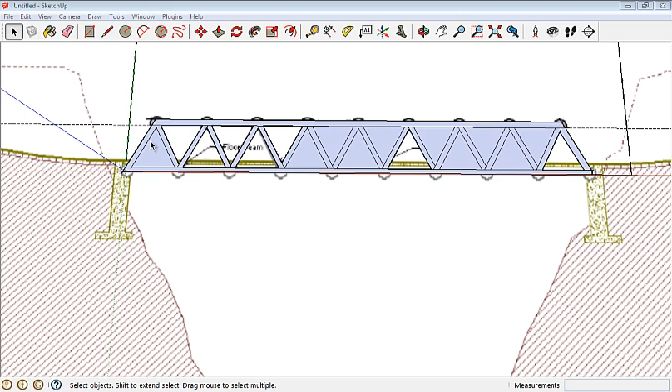Now that I've got a rough sketch of my bridge in SketchUp, I'm going to clean it up a little bit, starting with deleting these extra pieces of the triangles. Just clicking the delete button on your keyboard can delete those a little bit faster.

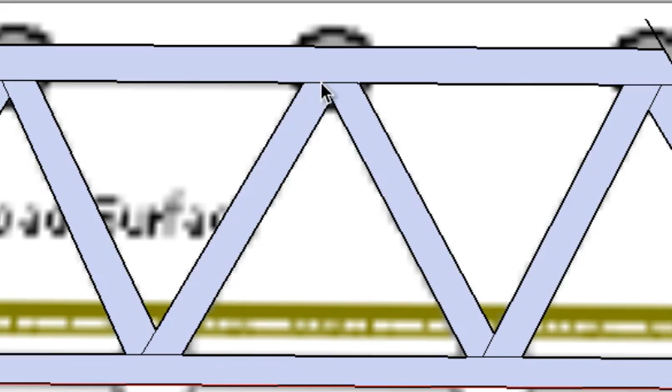There's quite a bit of other cleanup I still need to do, starting with any little lines sticking out the edges, and all these little lines connecting the pieces. To see that all a little bit better, I'm going to hide my screenshot. You can do that by right-clicking on it and going to hide. Then you can see I've got even a couple other lines up here that I need to erase from my starting rectangle.

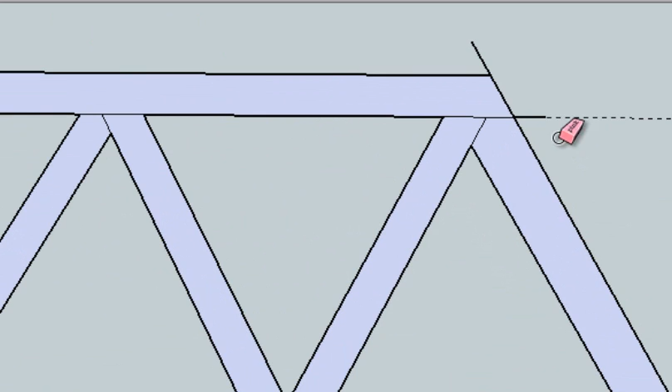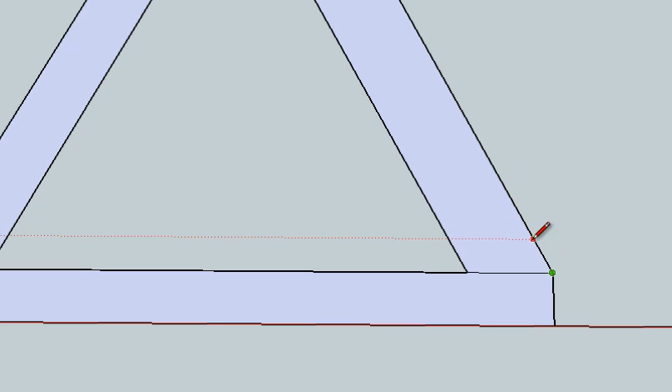Any lines that are sticking out need to be erased. Any lines that are connecting pieces together on the inside should be erased, so that we have one continuous surface. This corner I'm even going to clean up a little bit by extending this line parallel to that one all the way down. Now I can erase that, and that, and that. I'll just kind of move across my bridge, checking it closely for any of these lines that we're going to erase.

Alright, so you can see now I've cleaned up my bridge file. I've erased any extra lines that were sticking out or any of the extra lines in all the joints. Unfortunately, it's not a perfect replica - this V is a little bit taller than some of these other ones, but it's at least a close model to what I was working with in West Point Bridge Design.

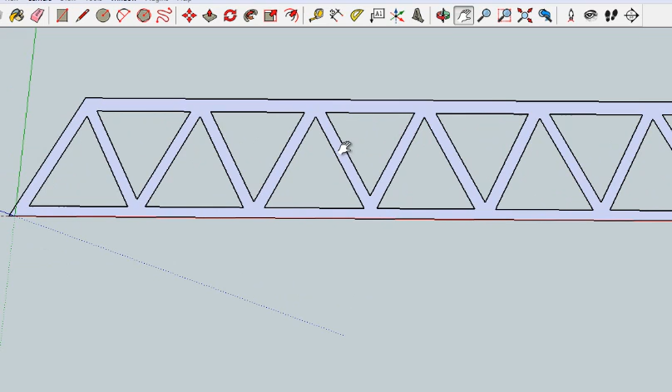You could definitely be a little bit more accurate by using measurements, maybe get a rough design and then specify the length of each one, designing it a little bit cleaner. But for a first practice bridge, this will definitely work.

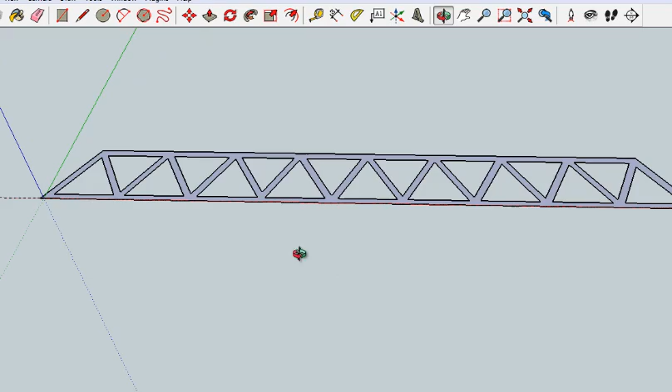Once you've got your model completely cleaned up of any stray lines, we can very quickly extend it vertically with a push-pull tool. The event description says we want the bridge to be around 1 inch wide - that's going to help it be a little bit more stable as we are testing it. So it should be between 1 and 2 inches, meaning at least 25.4 millimeters or anything up to 50.8 millimeters.

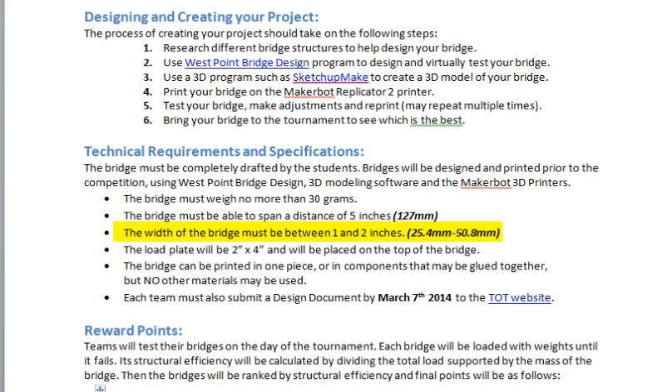As I am pushing this up with the push-pull tool, I want to watch the dimension box down here, the measurement box, to make sure I'm at least 25.4 and not more than 50. So this would be 25.4, and I kind of like that. Maybe I'll do a little bit more just to be a little bit extra.

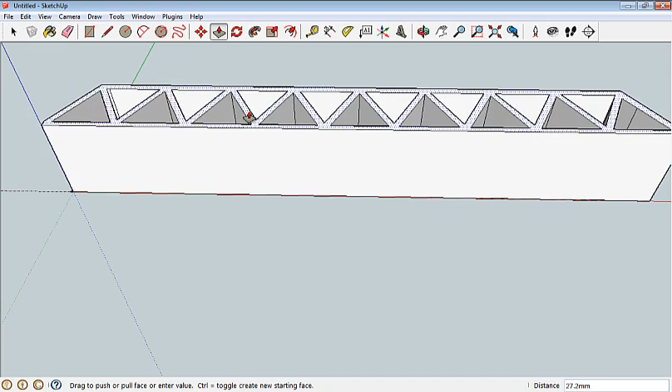Now I've got a very rough model of a 3D bridge that we would be able to print and test. Now you're actually looking at your bridge on its side. I'm going to recommend to print it vertically.

It's actually going to print a lot better vertically. The printer needs material underneath it to print well, so by printing vertically there will always be plastic underneath each one of these sections as it builds your bridge model.

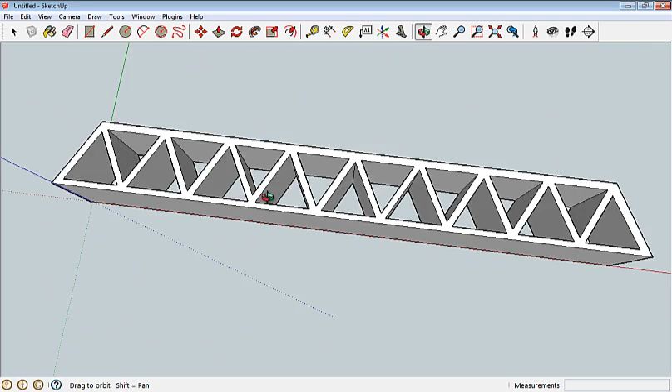If you were to print it sideways like this, you'd have a lot of places underneath these V's. As the printer begins building the bridge and adding plastic, you're going to have plastic kind of hanging out over nothing, and that will most likely lead to a poor print.

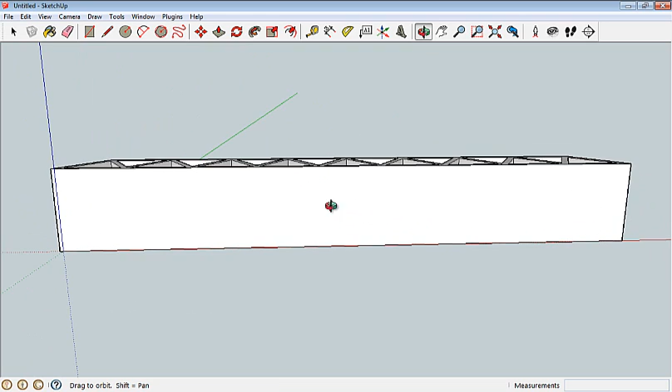But if you print it vertically, it's going to be much smoother. It'll actually be able to print just straight up on top of itself, and you should get a much smoother print.